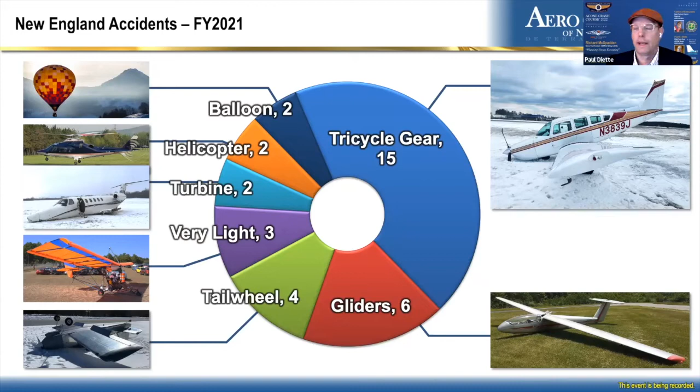And then here, just within the Boston FSDO, which is the area shaded in blue on the map at the right, again a distribution of accidents by injury type running from 2011 to 2021. And so no fatals within the FSDO under 2021.

Hard to call anything here a trend because the numbers are still relatively small, but they are distressing for anyone who's unfortunately affected by the accident, and each one has some lessons to teach us as well.

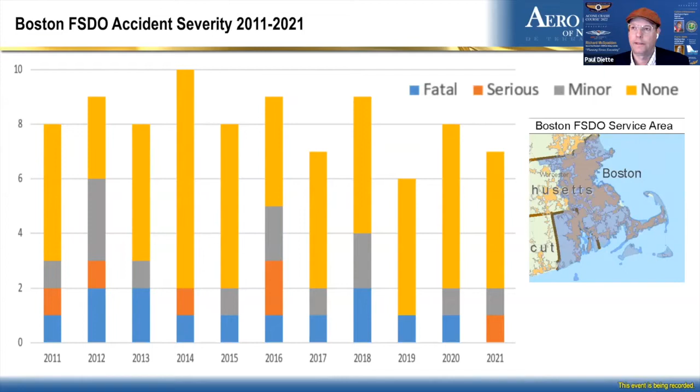So what are the major issues that are continuing to show up during this most recent period of time that we're looking at, roughly a year to a year and a half, depending on whether we're looking at the fiscal year or calendar year data?

First and foremost is loss of control, and that keeps showing up over and over again. It's essentially hitting things that really shouldn't be hit with an aircraft, and these are happening during departures and takeoffs as well as during landings, and we'll go into some detail on that.

Then there's an area of mechanical failure / maintenance, so we'll look at some examples. In every case, the examples we show are representative, but there are more accidents behind the curve than what we'll show you tonight.

We've got sort of classic pilot error or operator error, and we'll look at specific examples of those coming out of the accidents we've seen in the FSDO—fuel exhaustion and checklist mistakes, but we'll get to those. Airspace incursions, which is certainly a good way to ding your ticket and have a nice sit down with the FAA.

Not something you want to do, and it can also create conflict with other operations in that same airspace. We're seeing a lot of runway incursion, excursion, and lineup mistakes happening, so we'll dig into those, and then issues around pilot currency.

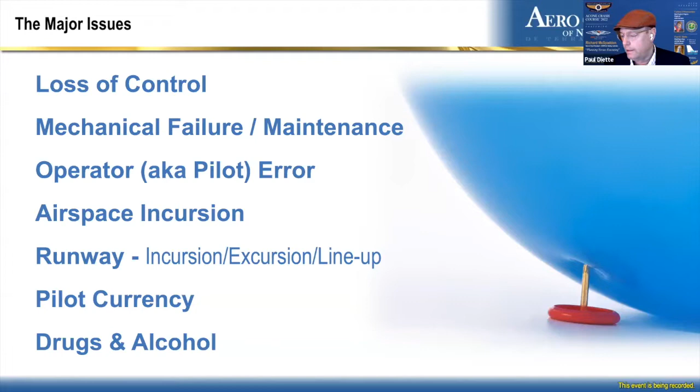And then the last category here is issues with drugs and alcohol, which are showing up in a very large and surprising percentage of the accident investigations being conducted by FAA and NTSB.

So within the loss of control bucket, we're looking at approach and landing, typically involving striking an object or experiencing a hard landing or pilot-induced oscillation, porpoising.

Those tend to be lower energy accidents than those associated with takeoff and departure, because as you're landing, you're subtracting energy from the airframe, and that increases survivability. Takeoff and departure accidents tend to be more challenging because you're continuously adding energy to the aircraft as you move down the runway and initiate the climb out.

And once you're above about 40 feet, things get very difficult if it's a rapid return to the ground. Challenges in the area of takeoff and departure can involve errors associated with weight and balance—that could be miscalculations or related to inappropriate loading.

Incorrect throttle or power settings, incorrect mixture setting, prop issues with how it was set or how it's performing, issues with delivery of fuel to the engine or engines, aerodynamic configuration problems where there's a failure to get those control surfaces and flaps and other high lift devices set as necessary, trim inappropriately set.

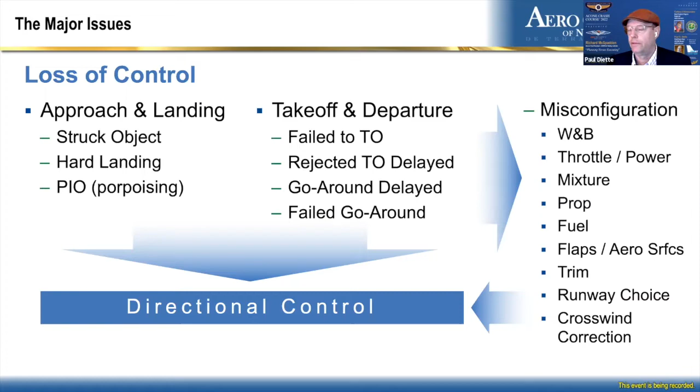A bad choice of runway can affect your ability to get off the ground and clear obstacles, and a failure to correct effectively for a crosswind. So we'll look at some specific examples here of approach and landing accidents.

So this was simply a case of an aircraft landing in very strong winds, and when the event was over, bent metal, but just minor injuries, and the pilot did acknowledge that they probably should not have been flying in that much wind.

I know every pilot alive has found themselves in a situation where you've made it into the air and then you're all of a sudden realizing, maybe I really shouldn't be here right now. This was not the greatest choice. You may have the opportunity, though, to find another airfield with a crosswind runway that might be more favorable to the landing that you have to complete successfully. And it may not be where you intended to land, but it might be a better place to go.

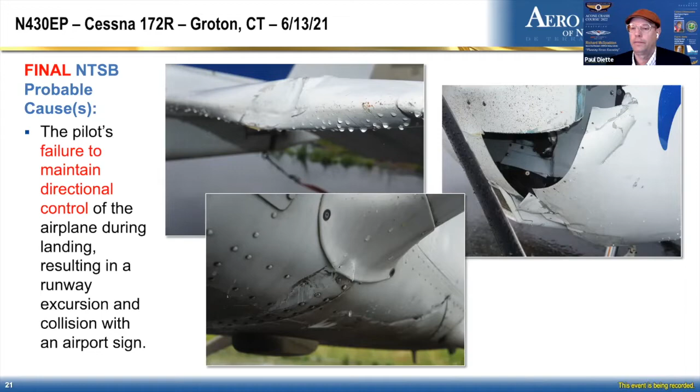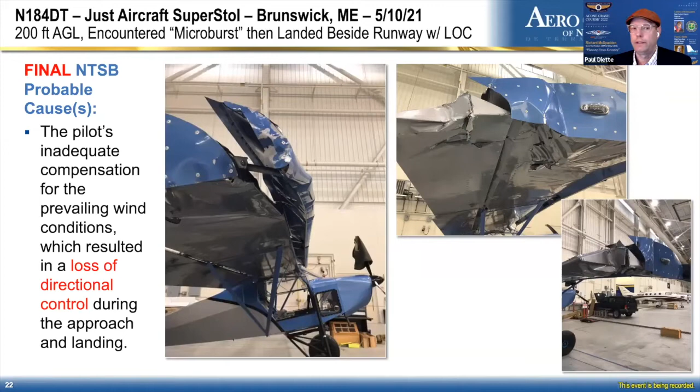And this is an aircraft that lost directional control during landing and struck airport signs. And you can see the type of damage that occurred here to this airframe in Groton, Connecticut. And this is another aircraft that encountered a microburst a couple of 100 feet above the runway surface and ended up landing beside the runway, and resulted in a loss of control with the damage that you see happening here.

And then this was interesting. So the way this was described in the NTSB report, this aircraft was being used with an instructor and the pilot who were practicing the impossible 180-degree turn, which is, of course, hard enough to do when it's a surprise, but it ended up with a hard bounce landing, which resulted in a loss of control with an excursion, with the striking of some objects en route to the final stopping point for the airframe. And the NTSB did cite that the flight instructor's delayed remedial action was a factor in this.

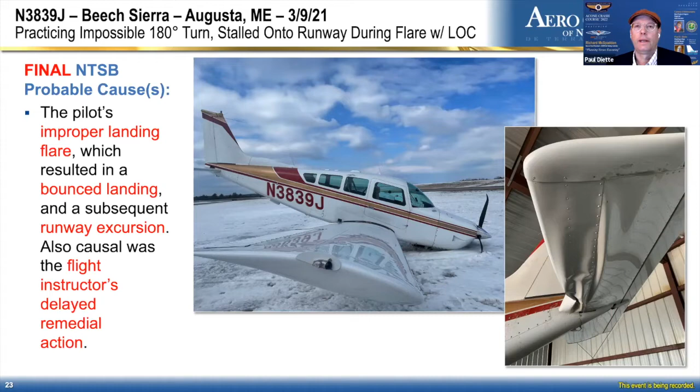One would think that if things weren't developing well during the final stages of that landing, having practiced this turn, bring the power up, go around, and do something different for a better outcome would be ideal. But stalled onto the runway during the landing flare, and we'll see more of those as well.

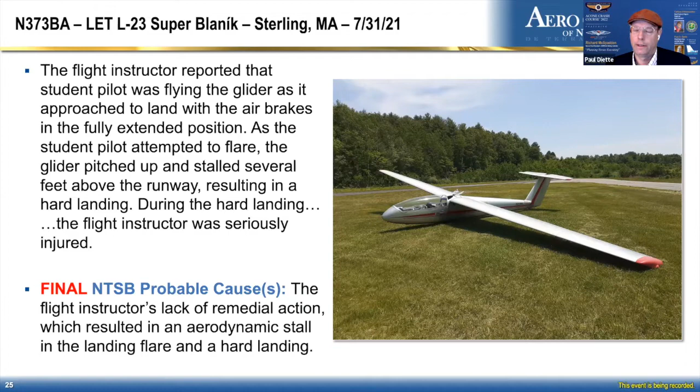And you will see several examples tonight, unfortunately, of where the instruction hasn't met the high standard necessary to protect the safety of the flight, and bad outcomes are the result. Everyone who's getting back into flying on a more regular basis coming out of the pandemic has to work extra hard to achieve the good outcomes that we expect and everybody wants to achieve with every flight that takes place.

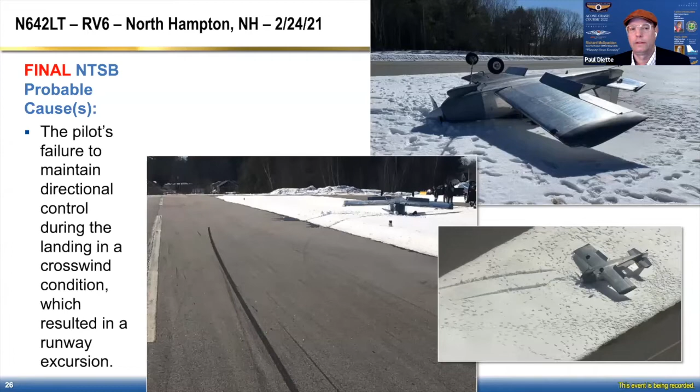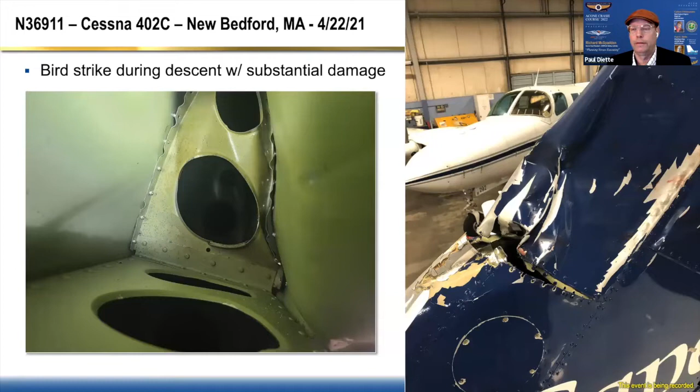This was an aircraft, and you can see here the skid marks that are on the runway. It was a failure to maintain directional control during a landing in a crosswind, and then once impacting the snow, the drag caused the aircraft to flip over onto its back, nose over, with the damage as you would expect for that type of accident. And then this was classified as an accident because of the severity of the damage. In this case, it was a bird strike, and if it hadn't been that severe, then it would have just been recorded as an incident during descent.

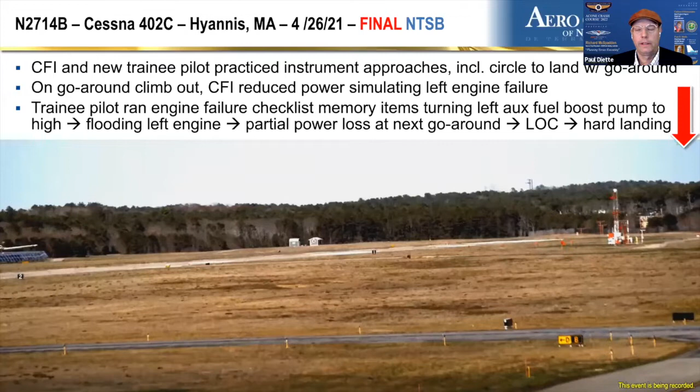So now the power is coming in. You can see the airplane swinging around, so it's starting to point directly at the camera. And the flight instructor takes over, and at some point it's inevitable, so they're going to end up with a hard landing, and you'll see the aircraft come back into frame from stage left. Now, we'll let this finish and then go to the slide that brings you the NTSB details.

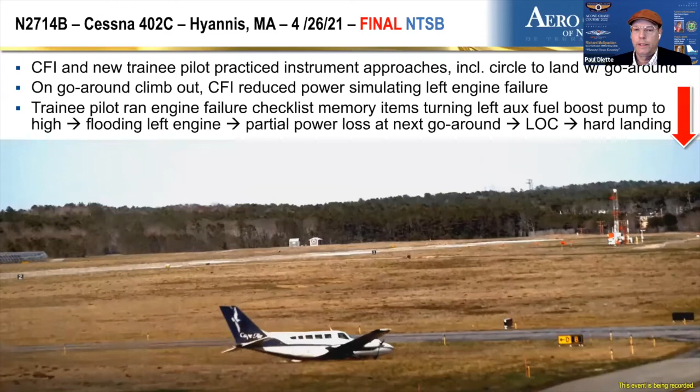Probable cause was the flight instructor's failure to confirm the position of the aux boost pump during a simulated engine out procedure, which resulted in excess fuel, subsequent partial loss of power, etc. The Boston FSDO has stated that the pilot was performing a memorized engine failure checklist that they had drilled to perfection in the sim, but when it was applied to the aircraft in real life, that resulted in the partial loss of power on the left engine, and that led to the aerodynamic loss of control on the next go around, which led to the hard landing.

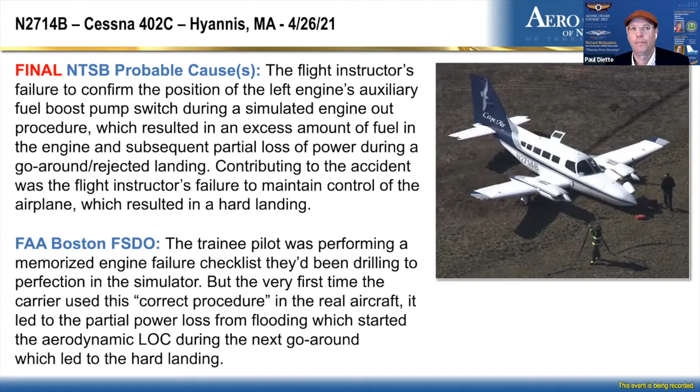This one is preliminary, so you should look at the final report when it becomes available, but this is a case that looks like the aircraft was attempting to land with a tailwind, and when performing a go around, when it looked like that landing wasn't going to be successful, wasn't able to achieve the climb gradient necessary to avoid the trees, and it did end up crashing. There was a fire. People did evacuate from the aircraft, and it's fortunate there wasn't loss of life or a more tragic outcome, but I'm sure that the people were affected by this quite badly, with serious injuries for all 7 people involved. So every one of these is something to think about. And this is a pilot that had almost 18,000 hours of experience and more than 10,000 hours of experience in type.

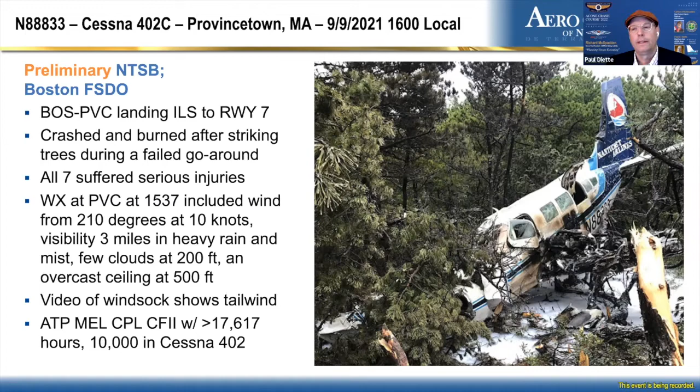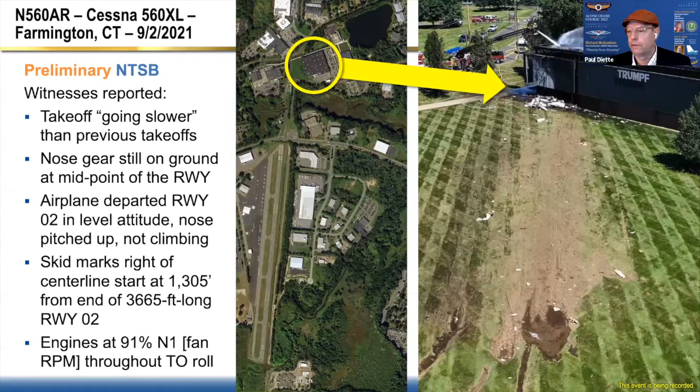And then this was, again, a preliminary. Watch for the final report. This is a case of an aircraft. Again, we're talking about that higher energy state associated with the takeoff, but the takeoff roll was going slower than anticipated, as described by witnesses. And we do know that about 2/3 the way down the runway, the flight crew applied the brakes, but it was too late. The engines were only producing 91% thrust. The aircraft did leave the ground, albeit over a short distance, and came back down to the tragic outcome that you see here. So this is a takeoff gone wrong, and there's a sort of rule of thumb some people like to talk about, and that's that if